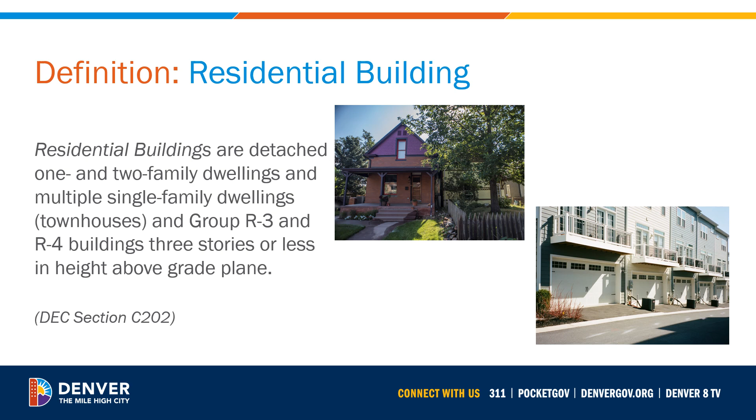Updates to the 2022 Denver Energy Code support Denver emission reduction goals by incentivizing electrification. All-electric properties have an easier path to compliance. It's important to understand, therefore, what qualifies as an all-electric property in the code. So let's go to the slide and see what the definition of an all-electric property is.

An all-electric property is one that contains no permanently installed equipment or appliances that utilize combustion, plumbing for fuel gas or fuel oil, or fuel gas utility connections installed within the building or site, except for emergency power systems and standby power systems. So to recap, an all-electric property is one that has no operational gas appliances or mechanical systems, including gas lines for fire pits or barbecues, and no permanently installed gas connections, with the exception that gas is allowed for emergency power systems and standby power systems installed in the home.

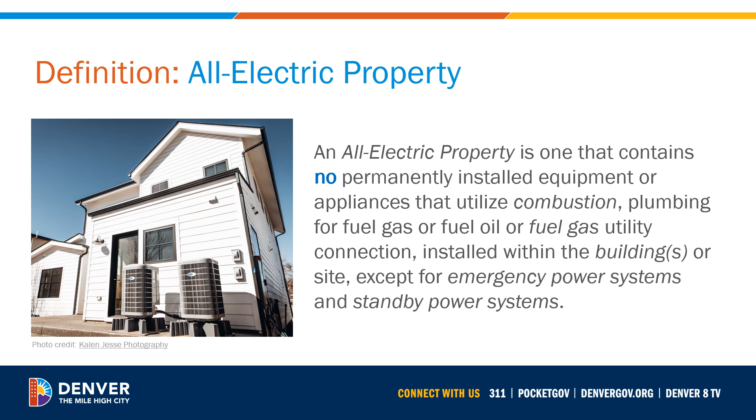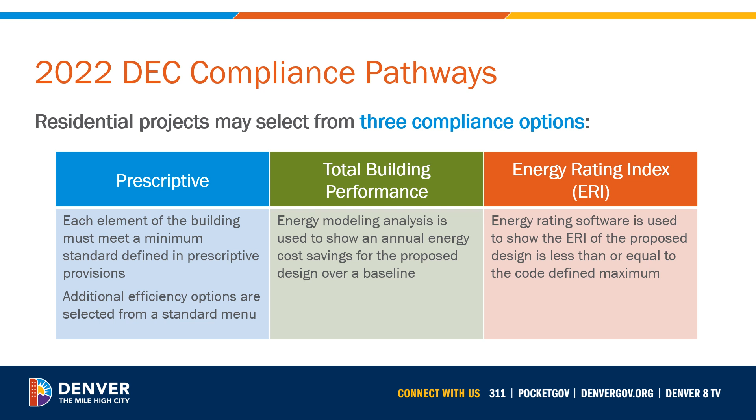The Denver Energy Code allows for a variety of prescriptive and performance-based compliance options to demonstrate that your project complies with the Denver Energy Code. You should become familiar with all compliance options so you can choose which one is best for your project. The code allows for these options to provide flexibility in demonstrating compliance, while the city is incrementally moving toward net zero energy homes. The performance-based pathways, Total Building Performance and Energy Rating Index, offer the most flexibility. Now let's look specifically at each of the compliance options, beginning with the prescriptive pathway.

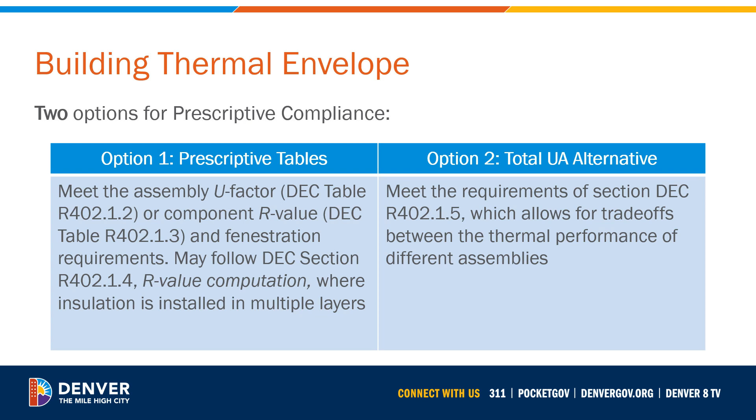There are two options for building thermal envelope compliance within the prescriptive section of the code. Option 1 uses the assembly U-factor and R-value tables, and Option 2 is a trade-off approach that uses total area weighted U-values. Option 1 is a straight prescriptive pathway that requires each assembly in the building thermal envelope to meet a maximum U-factor or a minimum R-value set in the code. For example, R-60 attic insulation, R-20 plus 5 wall insulation, or windows with a U-value of 0.27.

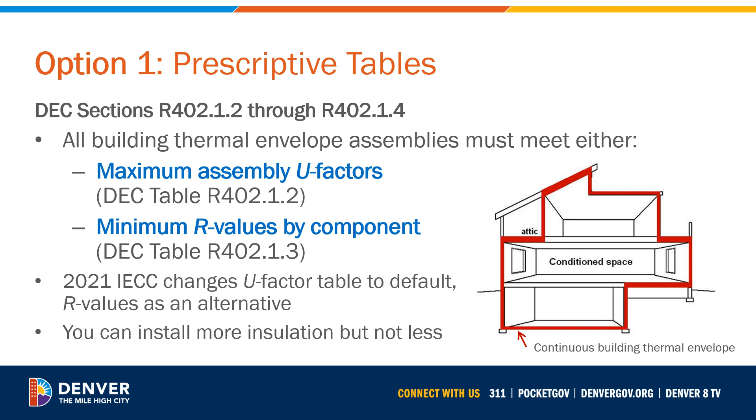In essence, you can install better performing materials in an assembly, not less performing than that called out by the two tables. If you happen to install layers of insulation, such as a flash of foam and then blown fiberglass in a wall assembly, you are allowed to add those R-values together to determine compliance. This compliance option is the most straightforward, but the least flexible compliance option available.

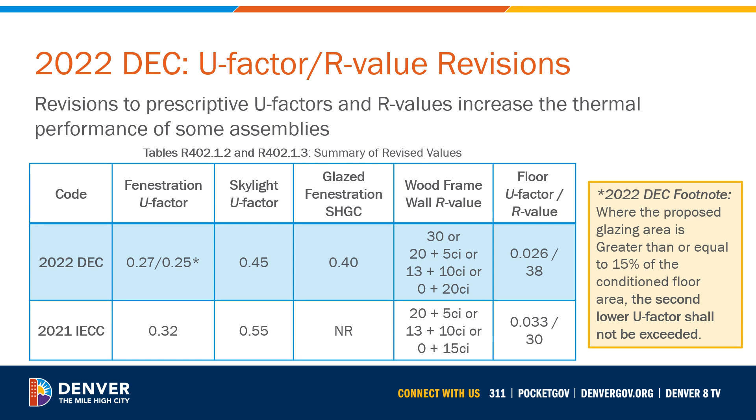The second prescriptive compliance option for the building thermal envelope is called the Total UA Alternative. UA stands for area weighted U-value, and this is a software modeling compliance approach. While there are multiple softwares available that can calculate the total UA of a building, only REScheck, a free tool developed by the U.S. Department of Energy, will be adapted to include the Denver amendments to the IECC. The 2022 Denver Energy Code revision of REScheck is still in development and will be available in the fall of 2023. An interim workaround policy is discussed in more depth in a recording of the prescriptive compliance training available on the City of Denver's website.

Software-based energy code compliance offers more flexibility because it allows for trade-offs between envelope assemblies. A trade-off refers to putting something more in one assembly so that you can put something less in another, while keeping the performance scale the same.

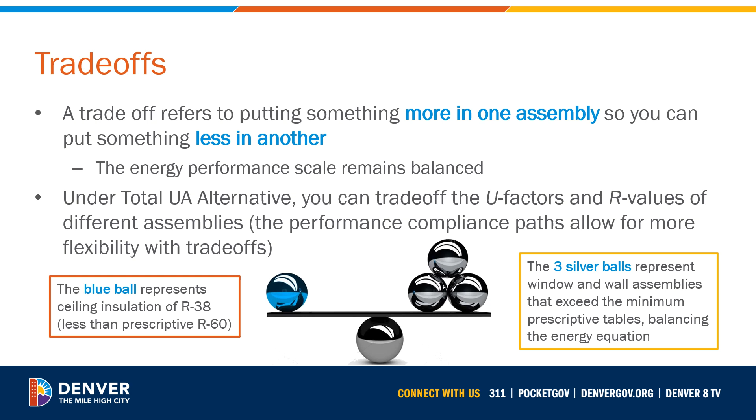Under the total UA alternative pathway, you can trade off only R values and U factors of the different assemblies. So for example, the blue ball here might represent ceiling insulation at R38 instead of what would prescriptively be required at an R60. In order to trade off that lower R value, the three silver balls would have to represent better window or wall assemblies that exceed the minimum prescriptive tables, thus balancing the energy equation.

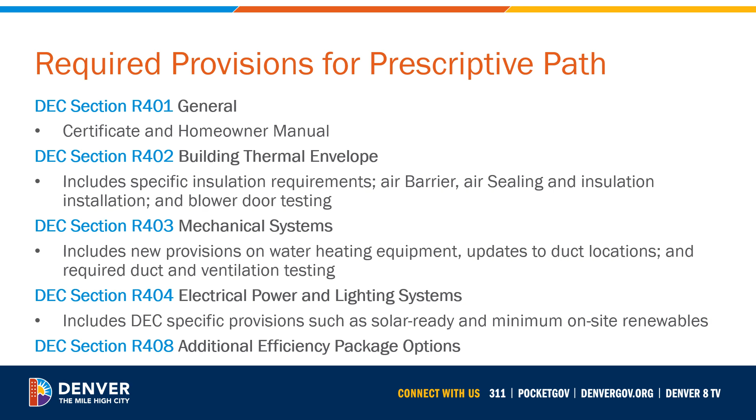Prescriptive compliance requires that a project complies with the entirety of all applicable provisions in sections R401 through R404 and also R408. Here's an overview of what is required. You should become familiar with these requirements before submitting your plans for permitting.

Projects following the prescriptive path must also select additional efficiency measures to meet the requirements of Section R408. The new credit method increases flexibility for prescriptive compliance with a variety of efficiency measures to choose from, while still promoting a more energy-efficient building than previous code cycles.

The number of credits a project must comply with is dependent on building type and whether it is an all-electric home or not. All-electric buildings have an easier path to compliance in order to promote building electrification that aligns with the net zero energy goals of the City of Denver. While mixed-fuel buildings must achieve 18 credits from Table R408.1, all-electric properties only need to achieve 3 credits in addition to space heating and water heating equipment requirements. More information on the additional efficiency requirements is available in the recorded prescriptive compliance training.

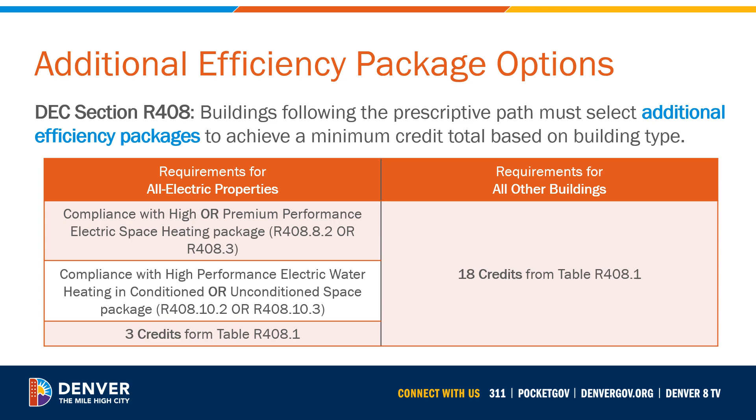Now let's look at the requirements for the total building performance and energy rating index compliance options. The total building performance path is a whole building energy model software compliance option. This compliance approach allows for greater options for trade-offs, as one can not only trade off U factors and R values, but can trade off improved air or duct tightness, for example, for lower assembly R and U values. The total building performance approach uses annual energy costs as the metric to determine if the proposed home is equal to or better than the same house built to the prescriptive U and R value tables.

The required energy cost savings are different for all-electric properties to incentivize electrification. An all-electric building must have an annual energy cost budget that is 5% better than a code-compliant reference building as defined in the Energy Code. All other buildings must have an annual energy cost budget that is 18% better than a code-compliant reference building. Projects that follow this pathway require energy modeling, which can be completed by an energy rater or other design professional.

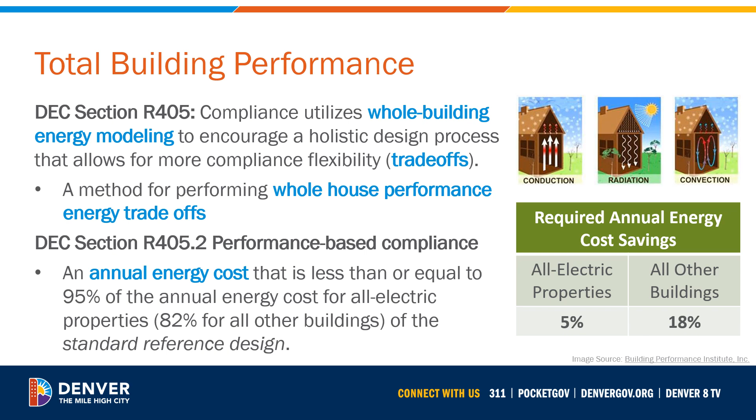The Energy Rating Index, or ERI, compliance option uses whole building energy modeling to show compliance. The ERI score compares the energy performance to a baseline rather than energy cost. The baseline design has a score of 100 and represents the approximate efficiency of a home built to the 2006 IECC. The ERI score is determined using energy modeling software that meets the requirements in the code and can be performed by an energy rater.

The Denver Energy Code Section R406 requires that the Energy Rating Index score of the proposed building be less than or equal to the score that is listed in Table R406.4. As with other compliance pathways, all-electric properties have an easier path for compliance with a maximum ERI score of 55. All other buildings must be more energy efficient with a maximum allowable Energy Rating Index score of 50. More in-depth information about this pathway is presented in a long-form performance compliance training available on the City of Denver's website.

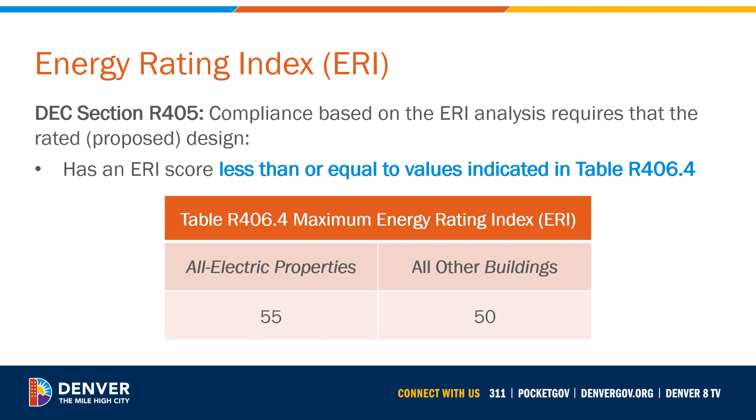In addition to the energy modeling requirements of the Total Building Performance or Energy Rating Index pathways, projects following either of the compliance options must also meet the requirements of all sections listed in tables R405.2 or R406.2 respectively. If you choose the Total Building Performance or Energy Rating Index alternative compliance approaches, be sure to familiarize yourself with these requirements.

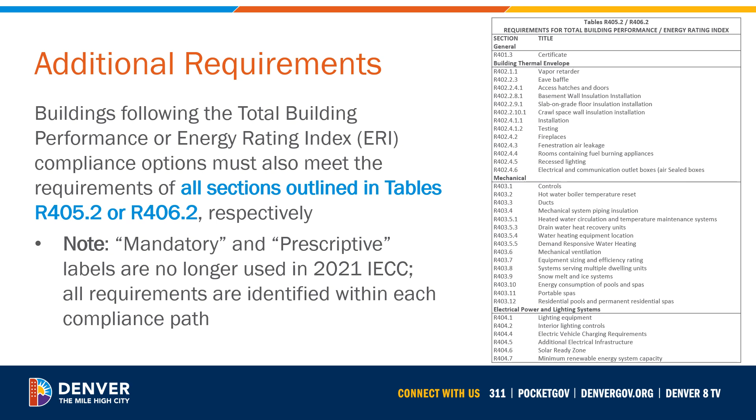For those familiar with the previous versions of the code, it's worth noting that there is updated language in the 2021 IECC and the 2022 Denver Energy Code. The codes no longer use the term mandatory or prescriptive to differentiate between requirements. All applicable requirements are identified within each compliance pathway. One last note is that additional energy efficiency packages in Section R408 are only required for projects following the prescriptive compliance path and are not required when using either the Total Building Performance or Energy Rating Index pathways.